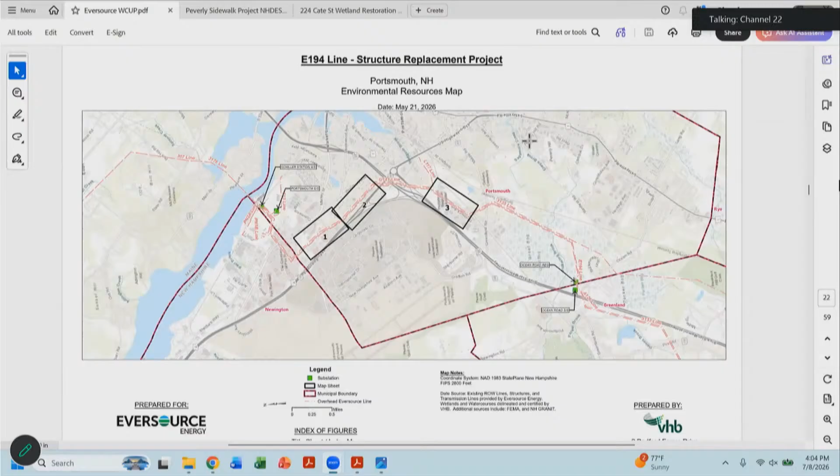The E194 line occupies the southernmost slot in that existing right-of-way and emerges from the Portsmouth substation and heads towards the Portsmouth Regional Hospital. So it comes down along Route 16 and then goes over to Liberty Mutual and the Portsmouth Regional Hospital parking lot areas. So the proposition is to replace all of the existing structure and associated equipment with all new equipment.

The line stays the same, so the structure itself will be placed proximate to the existing structure, usually about 5 or 10 feet away from the existing structure, and then they drill the hole.

They will first do the civil work. I can talk about that in a second, but they'll drill the holes, put the new structure up, transfer the existing lines to the new structure, and then they'll remove those existing wood structures and all the equipment out of the right-of-way. For the civil build-out,

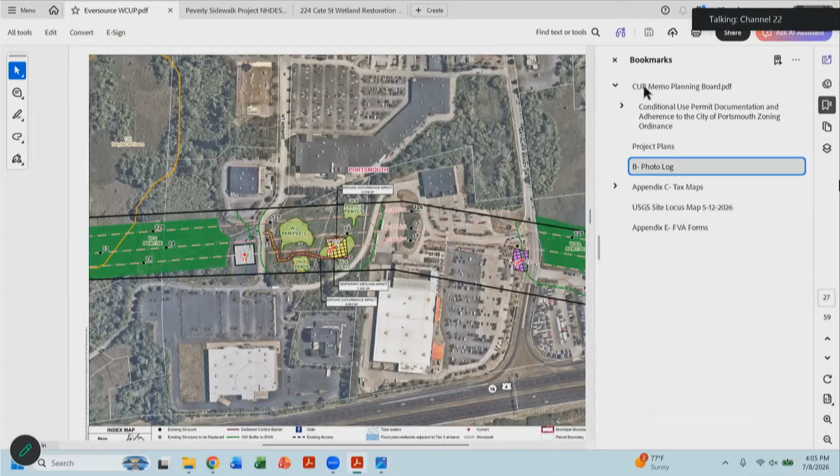Eversource is proposing gravel access roads where there is upland area. Those gravel access roads are about 16 feet wide to accommodate the equipment that's required, so there's cranes and bucket trucks that are needed to access the structure and conduct the work, as well as the drill rigs to drill the holes. They will create these 16-foot wide roads and then 100-foot by 100-foot work pads around each of the structures. For the structures that are in upland, those will be gravel work pads and access roads.

For structures that are in wetlands, those will be temporary timber matted. Those are 4 feet by 16 feet wide timber mat sections that are laid out one after the other to create a road, or in the case of the work pads, they're laid out in a relative square and used as the base area to perform the work overhead.

The pink shown on the site plan is for upland matting. So in upland areas where there's maybe some landscaped area that we want to avoid impacting, those areas will be matted as well. They may not be timber matted, they might be poly mats, plastic mats, depending on what the contractor needs to use to avoid impacts in those locations.

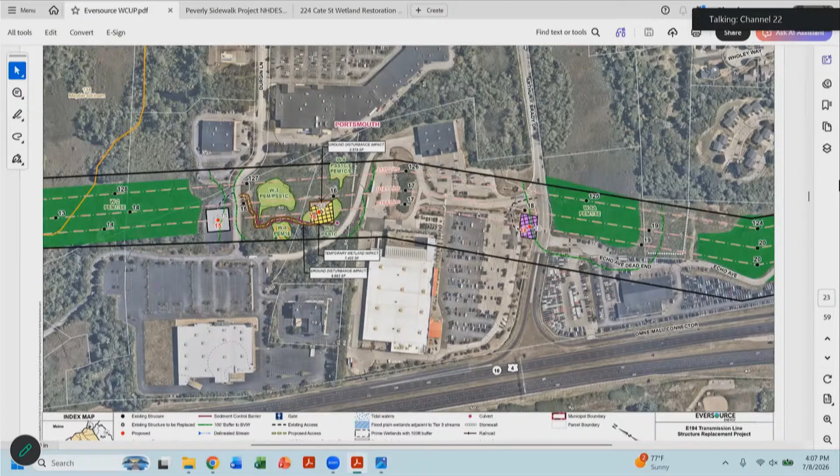The red around the access roads, shown with the yellow dash, indicates that some improvement to that access is required. And then we'll have sediment erosion control installed around wetland 3, wetland 4, and approaching wetland 5.

So we'll have access and erosion controls implemented, and we did our best to try to avoid wetland impacts where we could. We do have impacts both to the buffer and directly to the wetlands. The areas in the buffer we'd like to remain as permanent impacts with the gravel access roads to maintain existing access for the future.

Those roads will revegetate over time. We have evidence of that in previous projects we've done, so it won't look like a gravel road after a few seasons. But leaving that gravel base in place really minimizes the amount of work a contractor would have to do to come back and access that structure.

Also, within the gravel work pads that are 100 by 100, they will be reduced in size to 30 by 60, just big enough to get access with a bucket truck so they could get up overhead to a structure to address that.

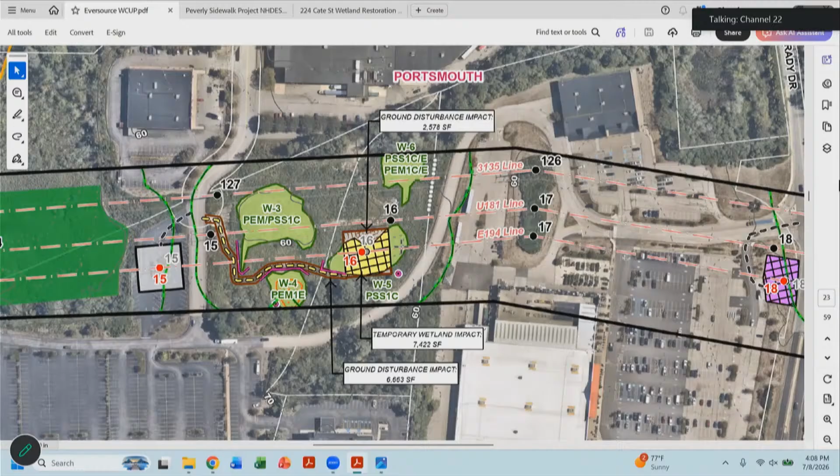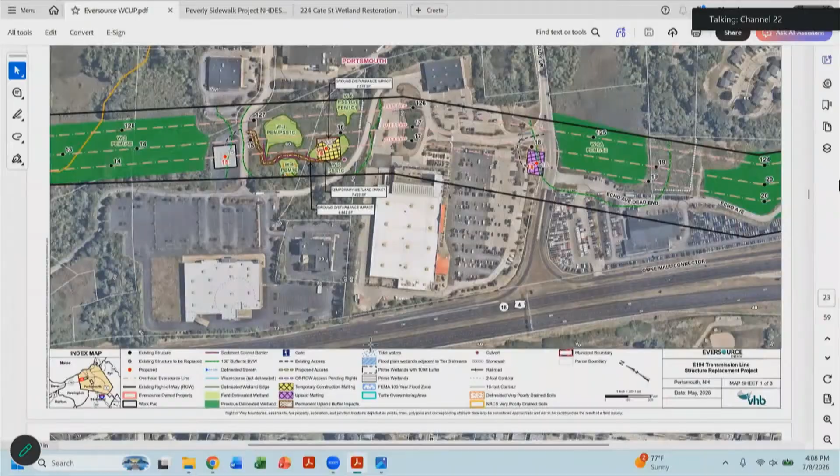Wetland delineation was conducted last summer. We've corresponded with New Hampshire DES, New Hampshire Fish and Game, and the New Hampshire Natural Heritage Bureau to identify any rare protected species such as turtles and plants.

We conducted a botanical survey this summer. We still have one more day to do, but we did not find any of the protected species so far. We're corresponding with the Natural Heritage Bureau to avoid any areas that may have rare species in them.

We have a time of year restriction for concerns regarding rare turtles, making sure we're not putting mats over turtle wintering habitat where turtles might be hibernating in those deeper wetland areas, or moving matting around while turtles are in the active season. We're corresponding with New Hampshire Fish and Game, got our recommendations, and similarly with New Hampshire Natural Heritage Bureau.

This project doesn't rise to the level of needing an alteration of terrain permit. The statutory permit by notification will be filed with the DES for this project. We haven't filed those yet because they have a one-year expiration. We're waiting to file them in August so that we have plenty of time to conduct the work and the restoration before that permit expires. So we'll be filing those statutory permit by notifications for utility maintenance in the next month.

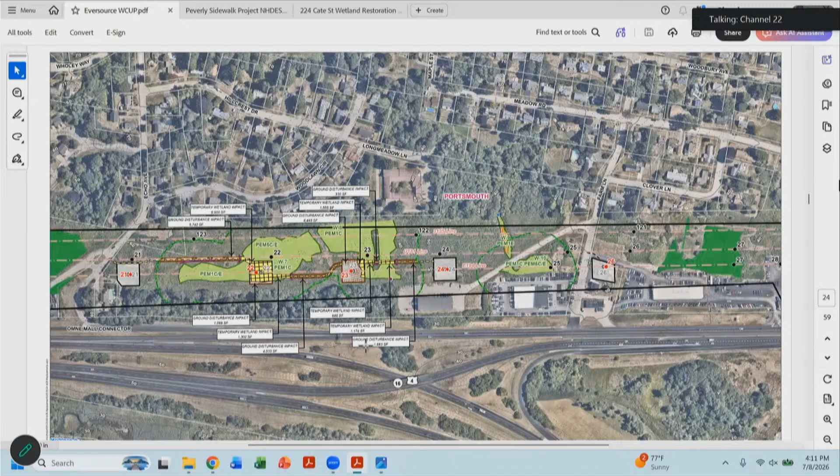Overall, the functions and values of these wetlands predominantly provide groundwater recharge, as they're depressional wetlands within commercial and industrial developed areas. Some have properties pertaining to rare species in a couple of them, which makes them somewhat unique - those are more the larger wetlands on the last page. They also provide nutrient removal and sediment retention functions coming off the developed parking lot areas right adjacent to those large wetland areas.

So this area is both very developed and has a lot of wetlands in it. We've done our best to minimize access in these locations, coming off the road directly onto the work pad to complete these structure replacements. The work is planned for later this fall, later this year.

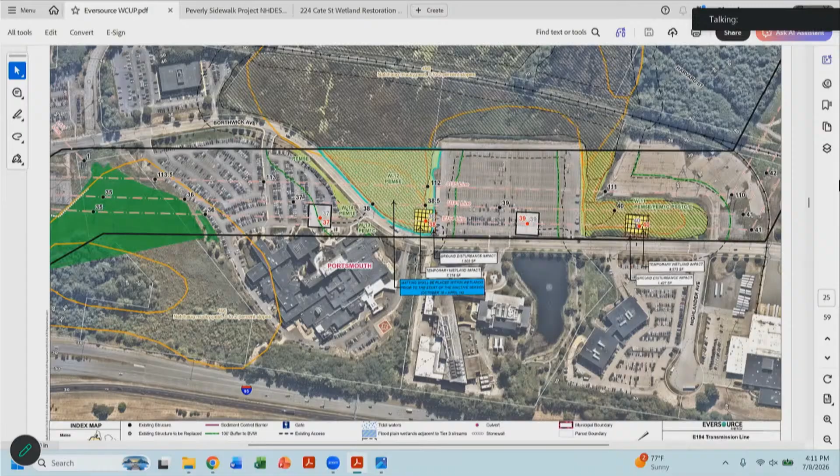Any questions? Thank you. Questions from the commissioners?

We do have Jess online now. Oh, hi Jess. Hello, I am here. If you have any questions, raise your hand or whatever that Zoom thing does. Yes, or chime in. I will, whatever's easier.

Just a quick one - I wanted to confirm, I think you said it here and in the field, that when you refer to upland area, that does include our wetland buffer, right? It just doesn't include the wetland itself. Correct. Okay.

So to follow on that, then any of the yellow dashed line that is not in a wetland would remain gravel. Is that accurate? Yes.

Have there been any other instances in Portsmouth where Eversource has put in a gravel maintenance road in wetland buffers so far? I think there was one that was maybe an after-the-fact permit. Is that the only one that we've seen?

Hi, Ashley Nicoletti with Eversource. Yes, we've been out in this corridor for several iterations of asset condition replacements. The last round, we replaced some structures over near Portsmouth Ford. We had an approved CUP - originally we were going through the wetland, and then we worked with Ford to secure an off right-of-way agreement with them to avoid crossing through the wetland, but we had additional buffer from that original application, which is why we had to come back a second time for the after-the-fact permit. But yes, in the past we have proposed doing similar nature work where we're putting gravel in the upland buffer, wetland buffer areas.

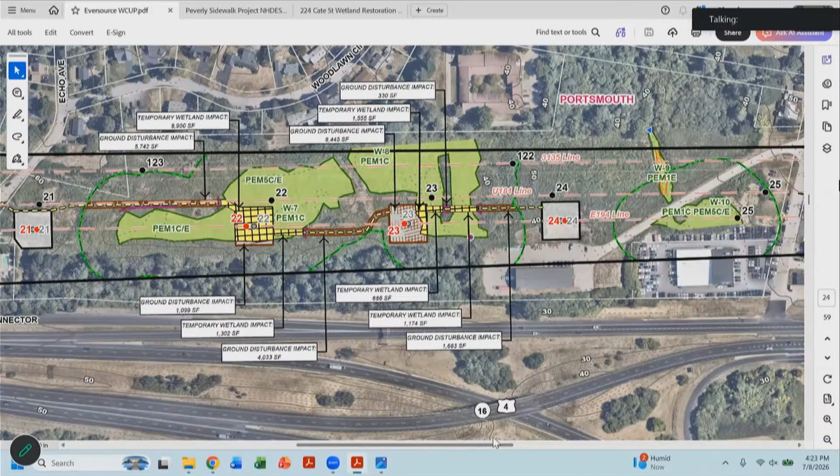Has it ever been considered to put some of that removed soil back on top of the gravel road to a certain thickness and seed it to a degree? Has that ever been done? Yeah, we've done it, that's been done in certain circumstances. Is that something that would be potentially could be done here, or is there a reason why it could not?

It's definitely dependent on how much topsoil material they generate. What we wouldn't want to do is have to bring in loam to get sufficient coverage, but yeah, that's certainly a technique we could use. I feel like any bit that could potentially sustain vegetation growing a little bit faster, I think would be amenable.

Clarification, and this I might have missed—so you said the mats are 100 by 100? So the work pads around each of the structures being replaced are approximately 100 by 100.

That facilitates construction, and when construction is complete, if the pole is in a wetland area, all of the timber matting is removed. But around the upland areas, we would have a gravel access area. But like on the page here, this is all parking, so there wouldn't be any pad after we were done.

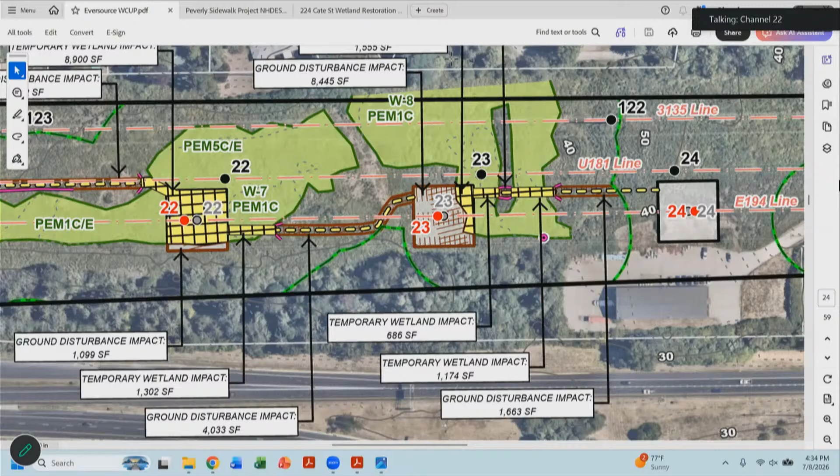Is there, just amongst ourselves, some concession allowing for one, and then to get between they would have to do timber mats? I'm looking at map sheet 2 of 3, where there's one to get to the first wetland, then one in between, then one after. Obviously it'd be nice to have all of them, but is there some concession, like one is most critical, and doing timber mats on a shorter stretch isn't as critical?

I'm forgetting that this is one of multiple of these projects, right? Meaning there's going to be more, because we've heard other poles. I can't remember to what extent the prior ones went, and if we have any insight for future ones, if the same concern would be true, because it would be nice to know if we're able to do something that's consistent and the best solution for the whole series.

That makes sense. I wanted to see the examples we've done prior, besides that Ford dealership one, because looking back at the aerials of that, that's what I couldn't recall, it just looks exactly the same kind of as when it was first put in, but I can't really recall how long ago that was.

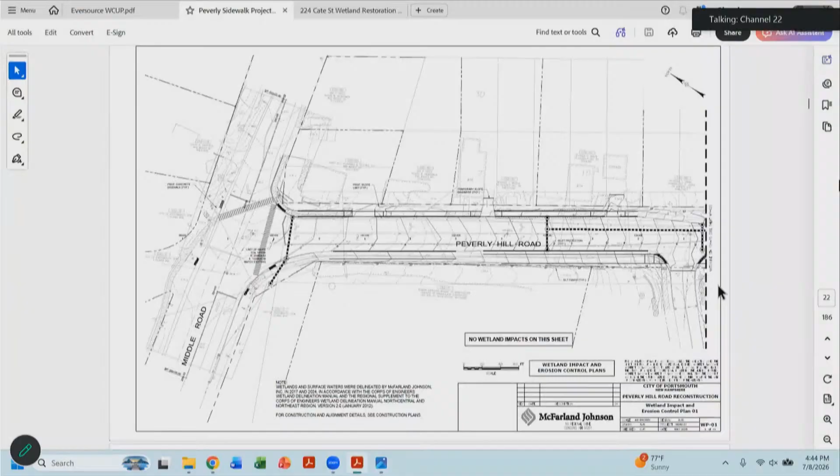So the purpose of our project is to improve the multimodal capacity of Peverly Hill Road and provide a critical link to amenities for residents along Middle Road and those living south of US Route 1. The project proposes adding a 10-foot shared use path to the west side of Peverly Hill Road from Middle Road to Banfield, and constructing a 6-foot wide sidewalk on the east side from Middle Road all the way to West Road, while keeping the roadway width at about 24 feet.

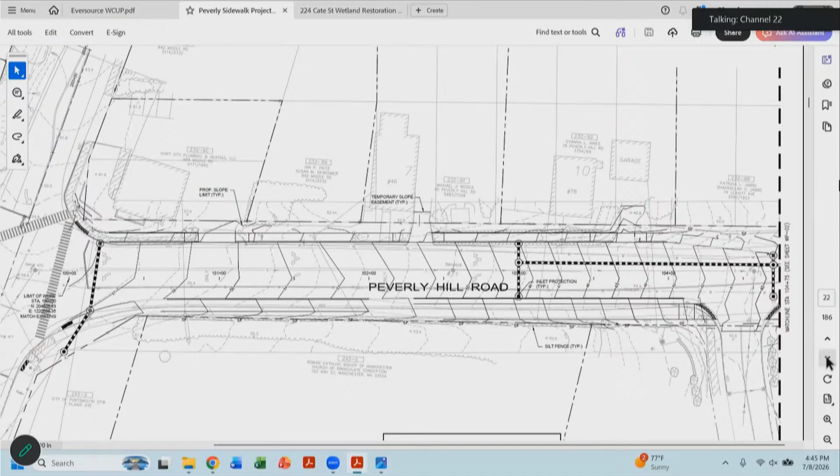With that improvement comes new curbing along the roadway. The roadway currently has no curbing, so stormwater sheet flows off the road and into adjacent private property. To protect pedestrians and bicyclists, we'll be curbing the roadway along its entire length and installing new closed drainage systems.

The existing impervious area within our project limits is just a tick over 5 acres, and we'll be increasing that to 6.15 acres of pavement, an increase of 1.08 acres.

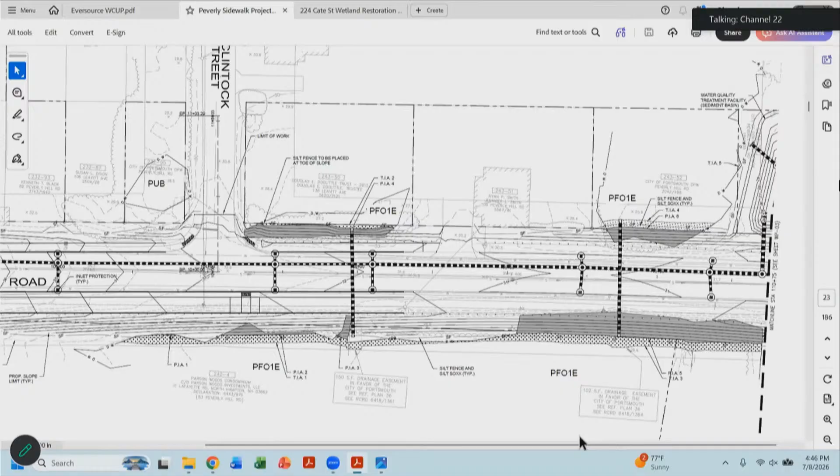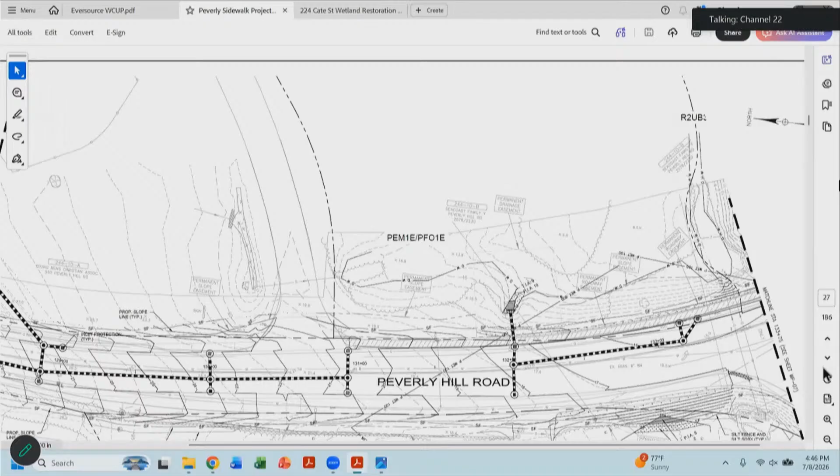To mitigate both our increase in flow and to provide stormwater treatment, we are proposing 2 formal stormwater control measures: a gravel wetland located behind the YMCA and the Park Taekwondo parcel, designed to treat 2.64 acres, and an underground infiltration basin using chambers in the DPW parking lot at the higher end of the southern end of the project, which will treat 0.38 acres.

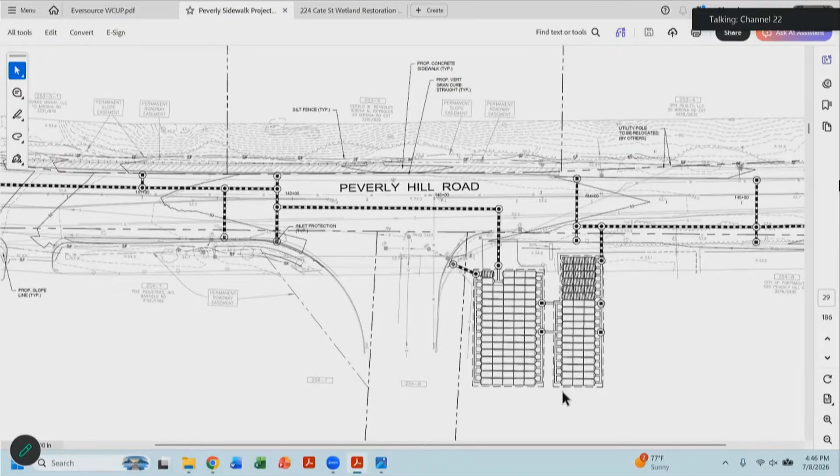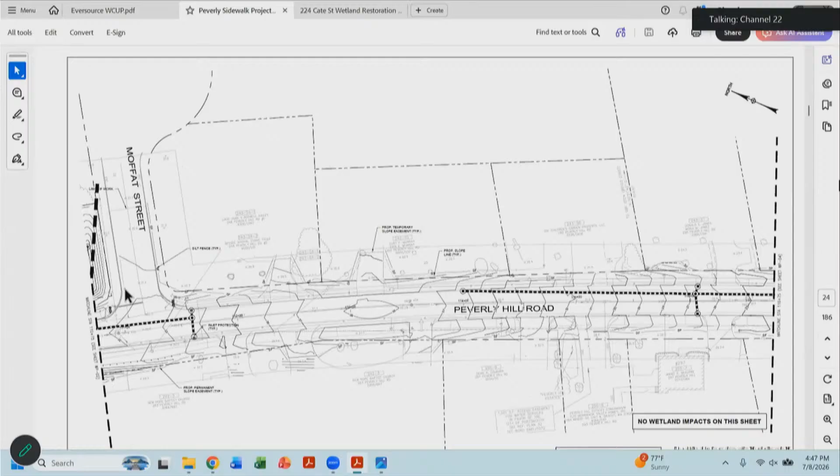In addition to those 2 formal stormwater control measures, we are also proposing sediment basins near Moffat Street and near Banfield Road. Due to existing groundwater and the relative size of the right-of-way available to us, sediment basins are really all we could fit within these 2 areas, but those have 1.2 acres and 1.6 acres directed to them, respectively.

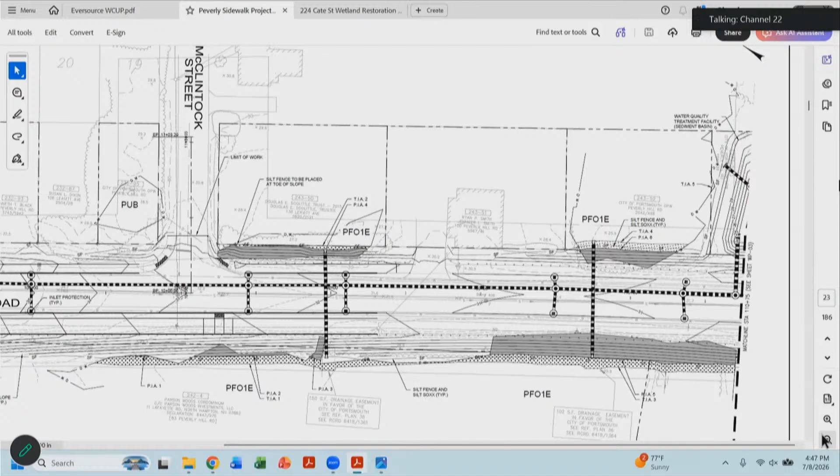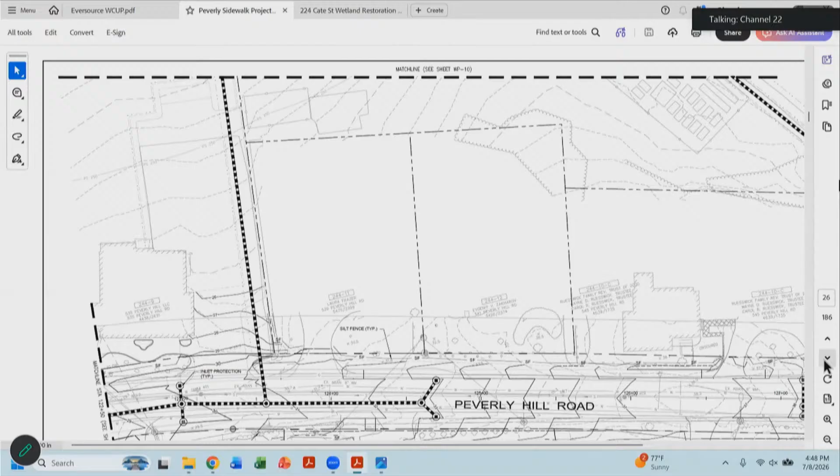The cover letter sent with our recent amendment mentioned we had 5 BMPs. The project at one point did have 5 BMPs - we had 2 gravel wetlands proposed, a small one in front of YMCA and one along Greenleaf Avenue. We've consolidated those into the gravel wetland shown on the plans now behind the Taekwondo, which has allowed us to pull it a bit more out of the buffer than originally proposed, and maximize the amount of treatment our project can provide.

We have proposed stormwater treatment basically everywhere gravity allows us to do so. There are a few places where, due to site constraints, such as near the intersection of Banfield Road, we do have a few direct discharges at existing locations, but we've made sure that at those locations we are not increasing the amount of stormwater flow going directly off-site.

I think that is it for description of the project, and I'll let Christine describe the environmental aspects of the project.

All right, good evening all. I'll give a high-level overview of wetland impacts, and we're happy to take your questions if there are any specific concerns. We'll start off by saying that the project does not impact any streams or tidal wetlands.

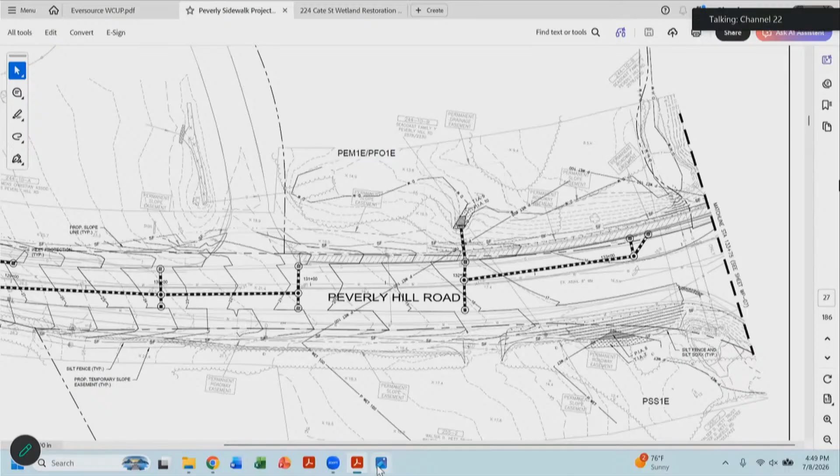There are 2 prime wetland systems designated by the city in the project area, one to the west of Peverly Hill Road and one to the east. The project will result in a small impact, about 67 square feet of permanent impact to the prime wetland to the west of Peverly Hill Road. That's labeled as permanent impact area 8 on sheet 6 of the wetland impact plans.

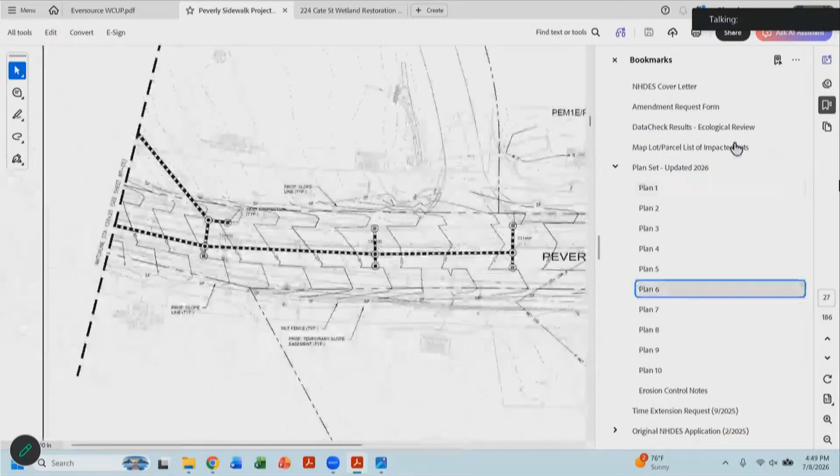The buffer for this prime wetland, the 100-foot buffer, is where the work will be occurring within that buffer is just the roadway footprint. So we've applied for a waiver from DES in our standard dredge and fill permit application to waive impacts to the prime wetland buffer in that area, since it's a developed area.

There are a few non-prime freshwater wetland systems along the corridor that will be impacted, resulting in just under 39 square feet of permanent wetland impact. All of these impacts are associated with drainage improvements and roadway grading associated with the proposed widening, and all take place at the roadside edges of the wetlands. There are no wetlands that will be bisected or completely filled.

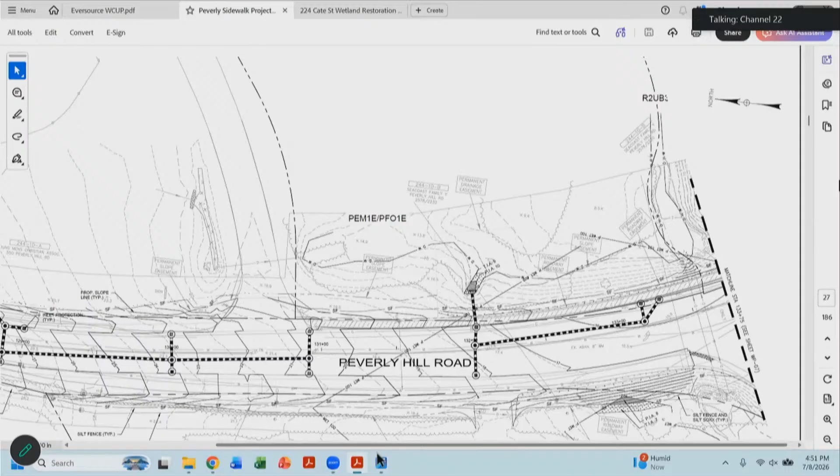The larger impact from the project is to the tidal buffer zone associated with the Sagamore Creek prime wetland system, on the east side of Peverly Hill Road. Again, there are no impacts to the tidal wetland system itself. We're quite a distance from the tidal wetlands, but we are still located in that 100-foot buffer. That impact is just under 9,500 square feet of permanent impact.

What sheet would we find what you're describing on? That should be the last sheet, I believe, of the impact plans. Sheet 10.

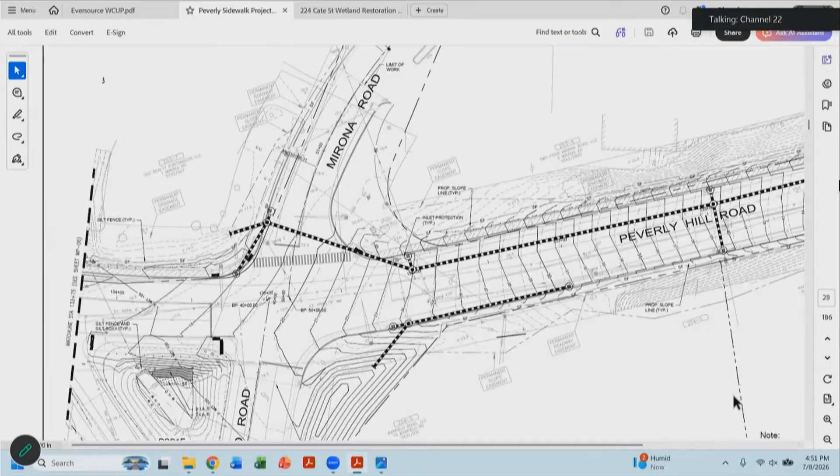So those impacts are in the upland buffer and are all associated with the construction of the proposed gravel wetland behind the YMCA.

As I'm sure you all know, one of the primary functions of a regulatory tidal buffer zone, the 100-foot buffer, is to help protect the water quality of the adjacent wetlands. The proposed BMP will serve the same purpose, through a man-made attempt versus a natural one. But the tidal buffer zone itself will remain vegetated in a different capacity with the gravel wetland that's proposed. The areas of disturbance will be seeded, and there will be some plantings provided around the BMP itself.

Therefore, we've applied for a waiver of the mitigation rules for this permanent impact in the tidal buffer zone from DES in our permit application.

As far as other resources, we have coordinated with the Natural Heritage Bureau. There are a number of natural communities and rare plants associated with Sagamore Creek that will not be impacted by the project. We've also coordinated with New Hampshire Fish and Game. There are records of Blanding's turtles in the project area, so we will be implementing construction BMPs to minimize impacts to turtles.

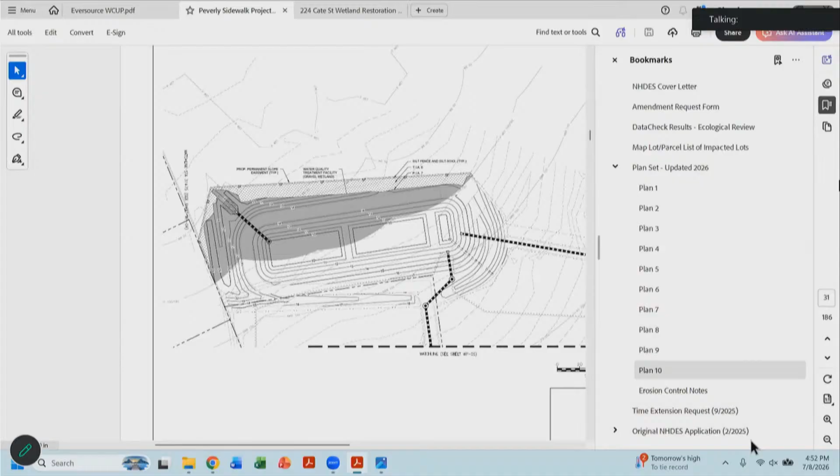We are happy to take your questions.

I just had a question about the materials that you provided. The first section was on the changes since, which I don't think we saw the original application. We submitted it, but we never attended a meeting to discuss it with you. We realized there was going to be a delay due to the landowner coordination that had gotten underway once we submitted that application, so we held off on attending. So you did not see the original application in a formal capacity? So it wasn't on our agenda or anything?

It was not. So the gravel wetland that you have in the new area, which is behind the YMCA, not the Taekwondo place, but what's behind it? No, it's behind the Taekwondo property, but on the YMCA parcel. So yeah, pretty much where the hand is circling now is where the gravel wetland is proposed.

So did you provide... I see a plan for it, but it doesn't really give any context as to where it is and what surrounds it. We don't see the location, in what area it is in. It doesn't show what's around it. I don't know if you want to show the picture again we had of—

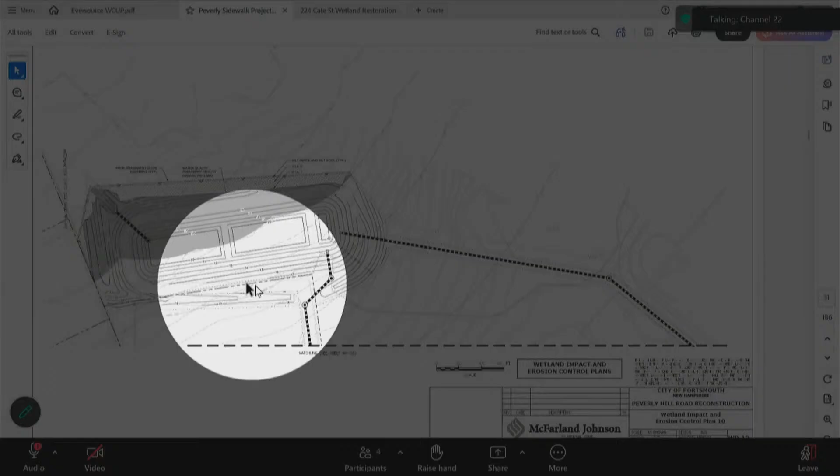That parcel line is right here, along the edge. So it's located just onto the YMCA parcel where the excavation would start. We have small ditches around the BMP to divert the natural sheet flow off the grass around the gravel wetland. But that point is the corner of the parcel that you saw on the aerial image.

So this is like flipped 90 degrees, kind of, like with the roadway? Yes. So that's a really vegetated area right now, right, according to that aerial? Yes. And so you're going to be cutting a lot of trees? Yes.

Can you give an idea of what the clearing area will be? There's a fair amount of bittersweet back there that we'll be mitigating. We've mapped all of the invasives throughout the project area, and we'll be following best management practices.

I don't have the areas of tree clearing on hand, but that's something we could certainly provide. The total area is probably in the full permit application.

How would you access to build that? Would there be more clearing associated with getting to that location? There are two ways to access it. One will be along the pipe coming from the YMCA parcel, where there'll be a 10 to 15 foot wide area as they trench the pipe through. But permanent access will be off the back of the parking lot for the Taekwondo. So that pipe coming through will be going through an area that's already vegetated, so it'll have to be cleared.

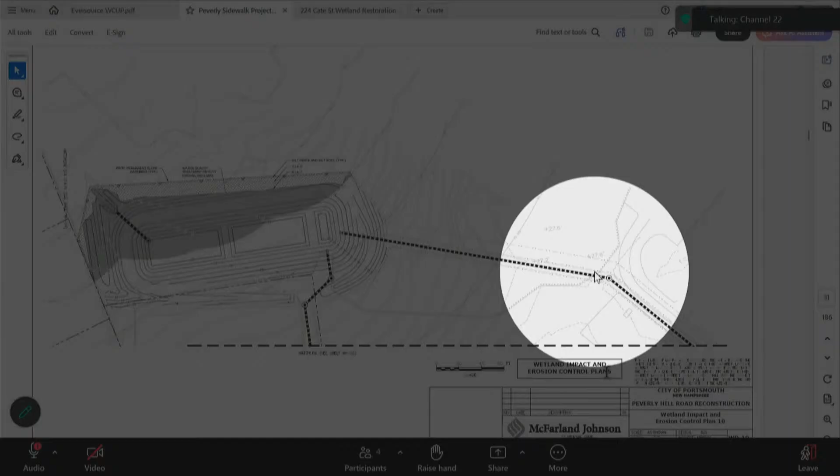Most of the area that the pipe from the YMCA is going through is lawn. If you go back to sheet 10, the tree line starts right there, so from here back to the YMCA it's through lawn, and then we're through the woods here.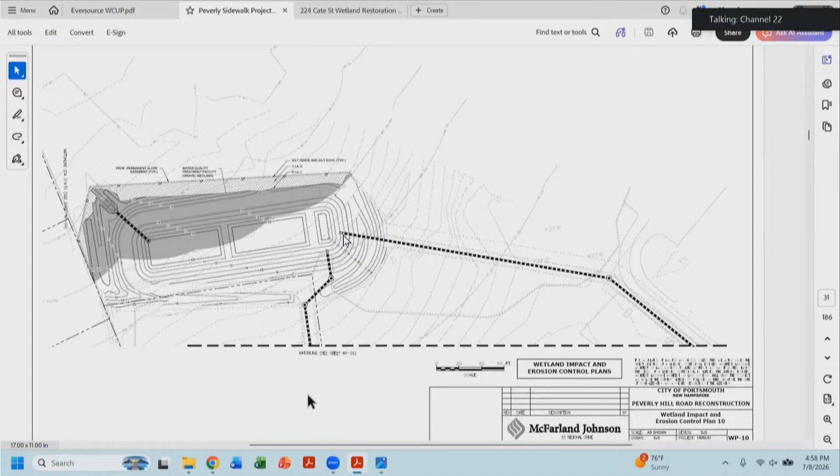So you said that's about 10 feet wide? Probably 10 to 15 feet wide. And I believe most of that is outside of the buffer. The buffers aren't labeled on here, but there should be a TBZ line that denotes, probably along that dark shading, the limits of the 100-foot buffer.

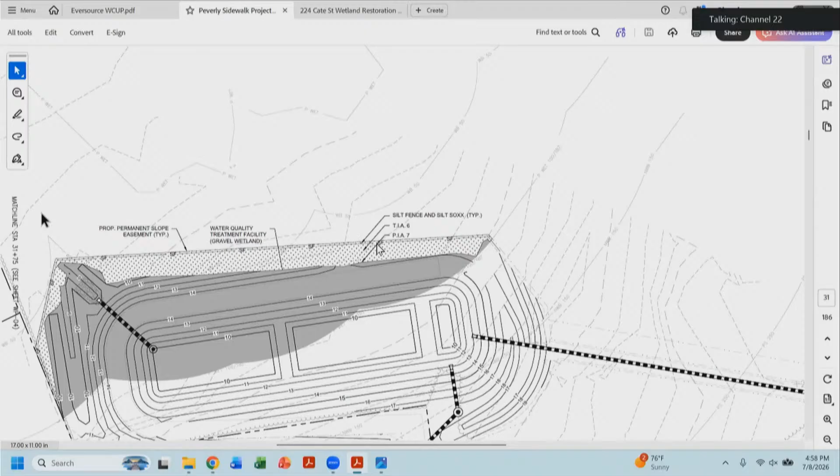To the prime wetland system, there was no way to get it out of the buffer, not without limiting the amount of stormwater we can direct to it. So we tried to balance getting as much stormwater here to treat as opposed to discharging directly to the stream, with being in the buffer, yes.

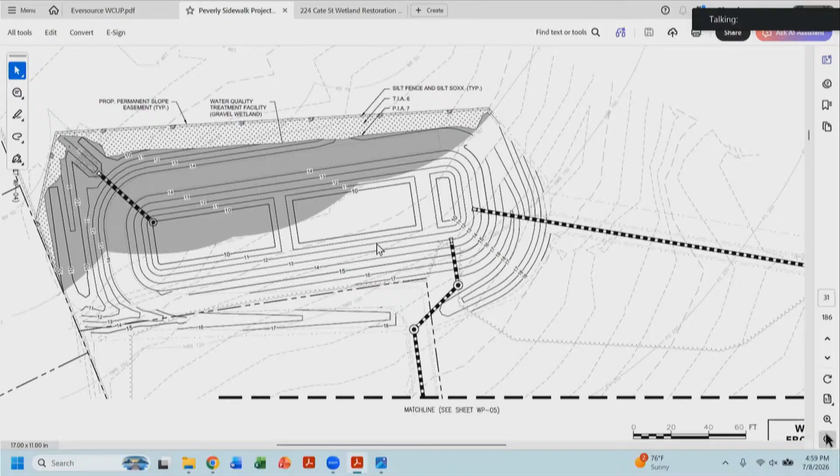I think we needed to find elevation 7 to outlet the amount of water we needed to. I'm just curious what alternative locations you looked at for putting some of these features in.

Sure, if you go back to the aerial image, we had previously looked at a location along Greenleaf Avenue, right here. Again, that was our other path to a low elevation outlet, which was also in the buffer. Just the terrain, here's the stream, and the terrain around here is steep, and that's all buffer as well. That wasn't really conducive to putting a large stormwater treatment practice.

And are we solving other stormwater issues in the area with all that? I guess I'm wondering why the capacity is so big. Is it really just taking the water from the path and the sidewalk, or is it also addressing other stormwater? So it's treating almost the entire roadway. We were able to get this to some of these BMPs.

Once we start to collect stormwater in catch basins and put in pipes, MS4 rules apply to us. We're going to have an alteration of terrain permit, so we're required to treat all of our new pavement 100% plus a good portion of the existing pavement. There is no formal stormwater treatment along Peverly Hill Road right now, so this project should enhance that by treating a good portion of the existing plus all of the new pavement being added.

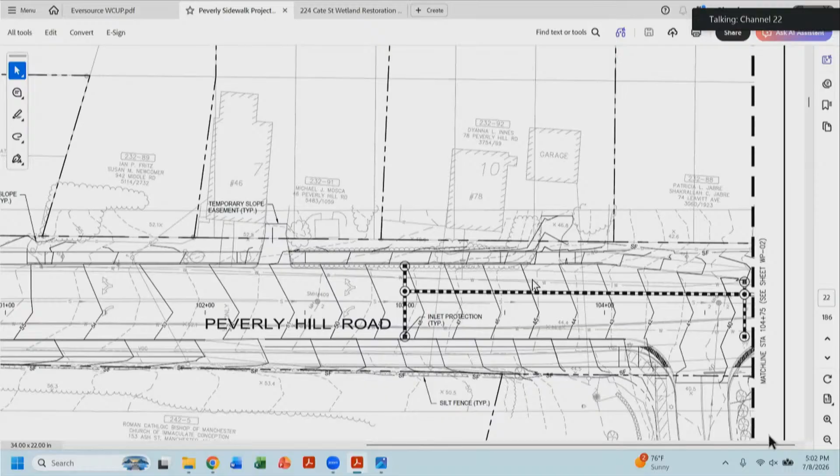Is that within the right of way and its impacts, 10 foot, or is that additional width? That's an additional width. I believe it's 3 or 4 feet. The landscape strip says 4 feet. So we're at 44 feet width, including that grass strip in between the road and the multi-use path. Is that accurate? Yep.

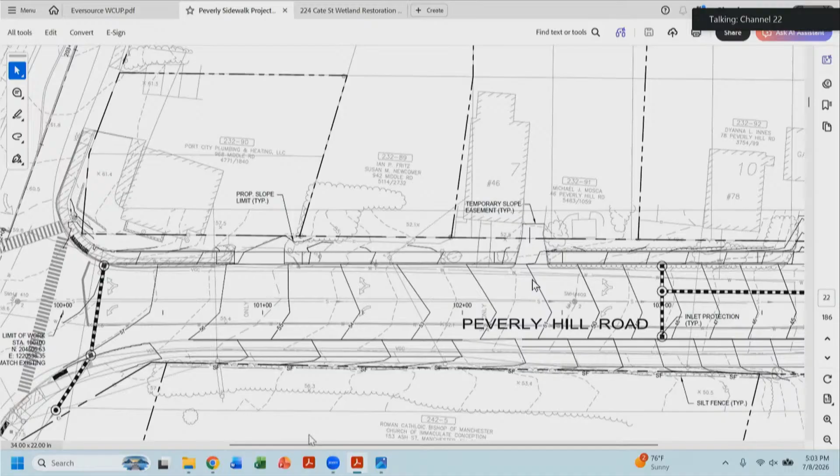Do you have any conceptual drawings? I don't think I saw any in the packet, although it was large. I'm seeing these widths, but how would it actually look?

We didn't include it in the package, but there's quite a bit of material on the city's website. This project has a webpage devoted to it, Peverly Hill Road, where you can look at the presentations that looked at the different alternatives we considered, multiple variations of the roadway layout. We went through several public informational meetings and actually had a public hearing because it requires some right-of-way takings. City Council found necessity for the project and the ability to take property if needed, but luckily all of our acquisitions so far have been amicable.

This has been a long project. I'm looking at it now, since 2016. Yeah, it's a big project, there's a lot of property impacts involved, so we studied it quite a bit. City Council had a lot of interest in making sure the project met the purpose of providing that critical connection for pedestrians and bicyclists, but also minimizing impacts to private property wherever we could.

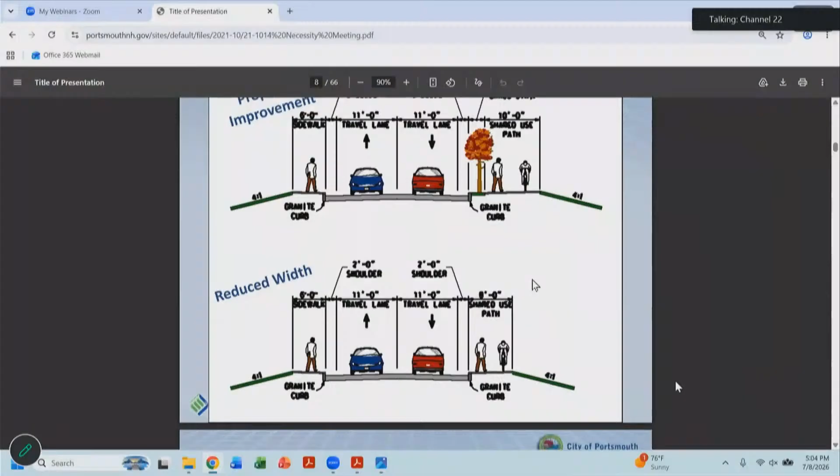This image shows, for most of the roadway, we'll be looking at the upper image, where we've got the two travel lanes, sidewalk on one side, the multi-use path on the other, and the grass strip with some plantings where we can. There are a few places where we've reduced that width either to reduce impacts to a natural feature or to keep within the existing right-of-way. In some places we've eliminated the grass strip next to the shared use path, and also reduced the shared use path to 8 feet in a few locations. Design guidance is that if you reduce to that width for a multi-use path, you need to keep it relatively short—10 feet is recommended.

And it looks like trees are proposed to be planted in that strip? Yes, in the 3 feet strip. And that's not the side the power lines are on? The power lines move around from side to side, so we've got to place our trees in an appropriate location so the power company doesn't come cut them in a couple years.

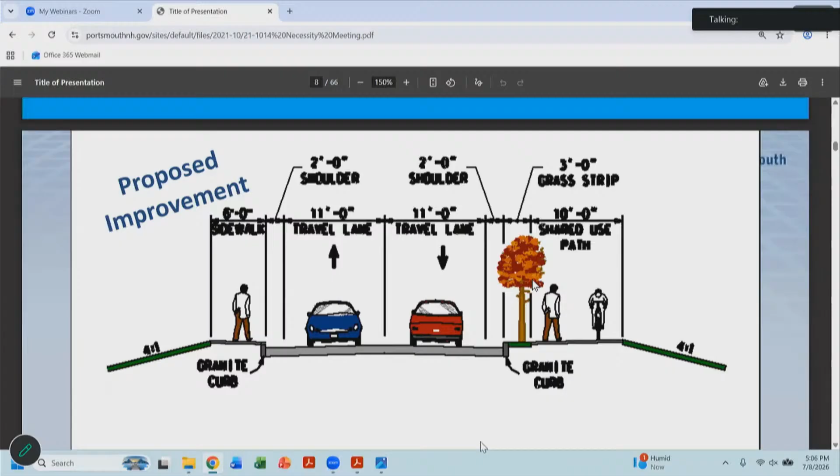Do you have this table with original application, amendment, and difference for the impacts, but do you have existing impacts of the road and shoulders now compared to this application? Maybe not in here, but somewhere, because I think that would be really important for me to see—the existing road out there now, and what part of that is going through, just in terms of the buffers. Like existing impacts in the buffer now versus the proposed, this application's proposed, temporary and permanent. I don't believe that number is in the application package now, but we could get that for you. Yeah, that would be important for me to see.

Probably the wetland too, I think—looks like there's wetland impacts proposed. Oh, so both that and the buffer—wetland and wetland buffer impacts, existing and proposed.

I just have a follow-up question: you don't have the conditional use permit tonight. What is the plan for that? Because we usually see that first, or on the same day, but then we look at it first, because it's kind of hard to say this is okay for the wetlands one when we haven't seen the other one—you might have to make changes later on, or we might want to talk about making changes later on. Understood, they got a little out of sync for a number of reasons, but we are working on that now and will be submitting by the deadline for next month's meeting.

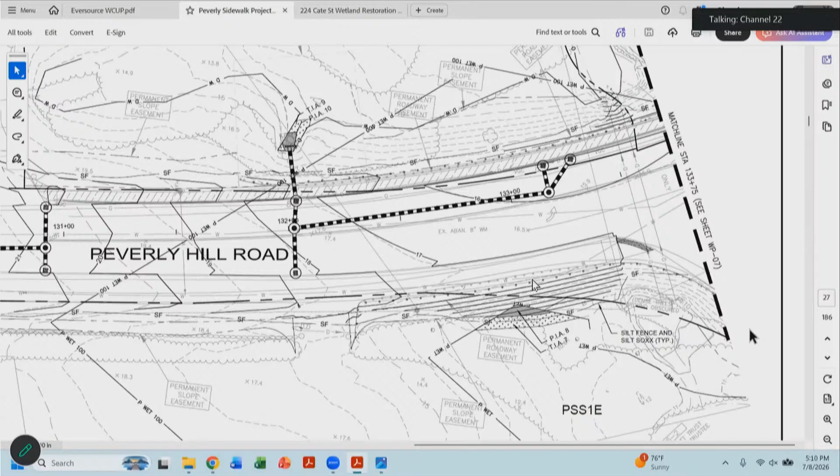We don't have the buffers mapped for every wetland, only the prime wetlands on these plans, but we can add that for the conditional use permit. That'd be helpful. This gives you a sense of where the work occurs in relation to the tree line that's been surveyed out there.

So this is a tree line here. Proposed work is anywhere where there's these bold lines, so this would be grading work down to the wetland. Most of this area is open wetland that would be impacted. Then following along through this buffer area, the work, at least in this area, ends before the tree line.

That's a prime wetland down there? That is the second prime wetland, yeah.

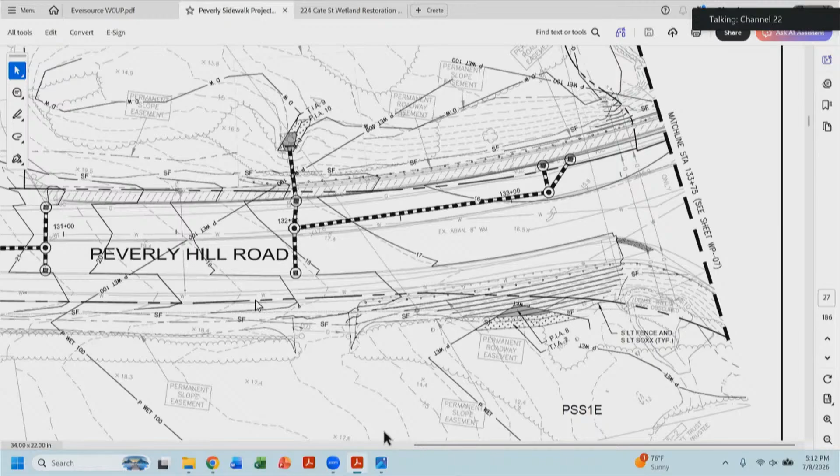This is a small detail, but it would be really helpful when reading these plans if it's possible to use some color to show where the multi-use path is and where the sidewalk is. There's just so many lines, it's very difficult to see exactly where things are, and then make it even more obvious where it's crossing into a buffer or a wetland, because that's what we most care about.

Also the wetland, 100-foot wetland buffer, making that very visible would be really helpful. I struggled a lot with these plans, just trying to figure out where everything was going. I feel your pain. Yeah, we can see what we can do to make it a little easier. We'll be seeing it next month anyway.

Any other questions?

Quick one, sorry, just a clarification. You said the other prime wetland across the street doesn't have any impacts. Is this impacting the buffer, this outlet, the outfall area that's to the right of YMCA?

I don't believe so. I can take a look at what we have mapped. I'm seeing now that the stream itself isn't on the plans as prime wetland. I can take a look at that, to see if that's wrong.

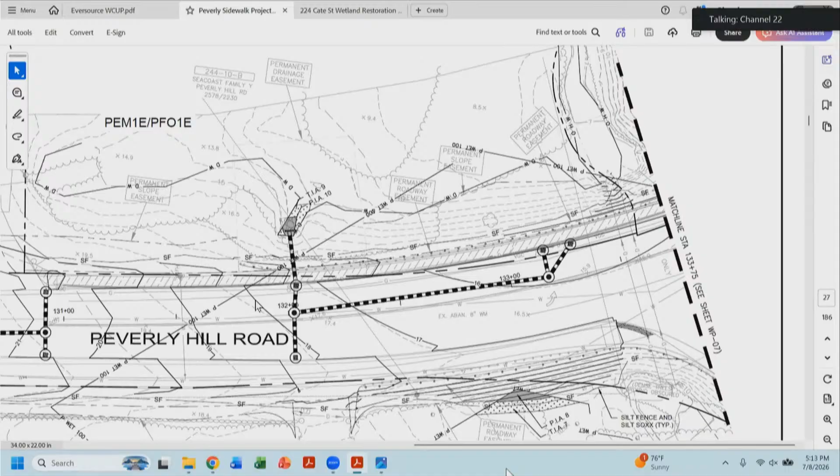Question. So I have actually two questions, but one has to do with the maintenance or vegetation plan and applying fertilizers. I didn't know if that's across the board or if you had something different, and that's definitely another buffer type of question.

Just something to consider, because of our regulations on fertilizers, and also DES has some on that.

I had a question about the timeline and when you'd be considering doing this work. We're hoping to get this project advertised in October or November. It'll take a bit to award, and we have DOT funds, so there's a few more hoops to jump through, but we want to make sure we're out there this winter to do the tree clearing to avoid the bat restriction. So that's our timeline. In terms of planting details and fertilizer, we're mostly relying on DOT specifications, but we can review those to see if we need to supplement that with anything. That would be great, thank you.